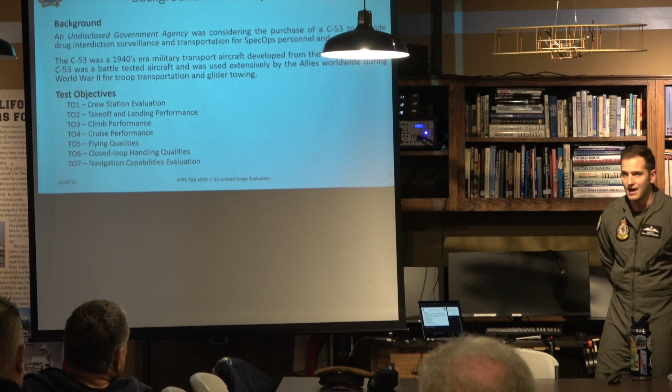A bit of background: put forward to us as a team, an undisclosed government agency was considering the purchase of a C-53 to provide drug interdiction surveillance and transportation for Spec Ops personnel and cargo. The C-53 itself is a 1940s era military transport aircraft, developed from the civilian DC-3 for those who aren't familiar. This aircraft is battle tested, having been used by allies worldwide during World War II for troop transport, glider towing, general cargo, and other related missions.

The objectives we had as a team were broken down from the user requirements. There are 7 general objectives. We looked at the crew station evaluation—how the pilot and crew in the front can do their job—the takeoff and landing performance of the aircraft as required for the mission, the climb and cruise performance for the mission set, the flying qualities (how the aircraft responded in the open loop sense, and then how we felt the aircraft responded through the controls), and finally the navigational capability of the aircraft.

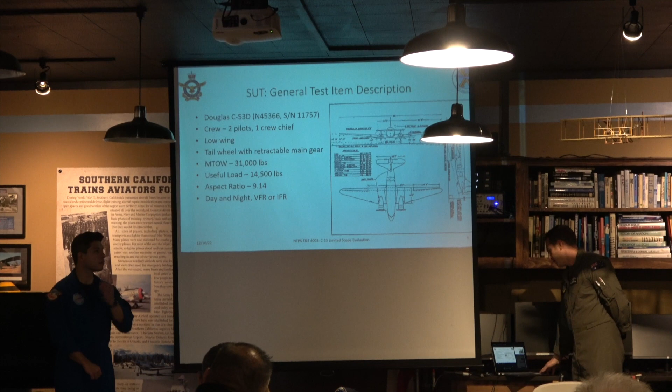Just moving on to an overview of the aircraft itself, for those who aren't familiar with the specifics of the aircraft. The reason we go through this is to highlight the aspects of the design that affect our results in our testing and what we're looking at.

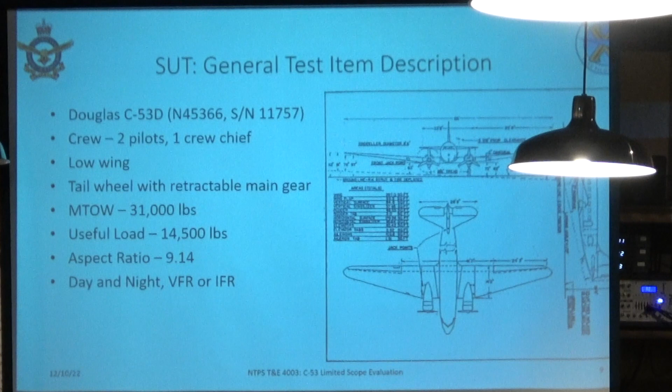A general overview: the crew is 2 pilots, 1 crew chief, a general low wing tail wheel with retractable main gear, max takeoff weight 31,000 pounds with a useful load of 14,500 pounds. The aircraft is capable for day, night, VFR, and IFR operations.

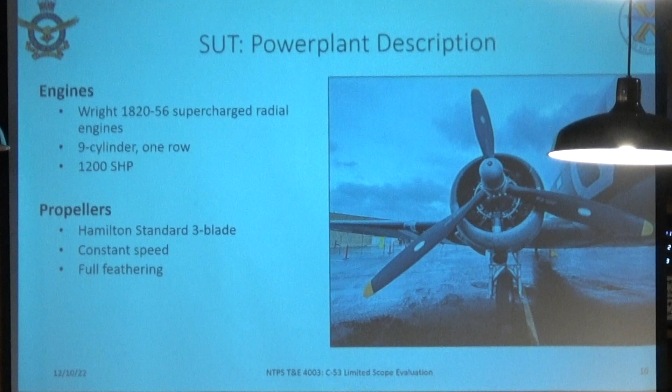For the engines, there are 2 options. The ones installed on this aircraft were Wright 1820-56 supercharged radial engines, the single row 9-cylinder as opposed to the dual row 18-cylinder engine. Same shaft horsepower of 1,200 each, with Hamilton Standard 3 blade props attached to each engine, constant speed with full feathering capability.

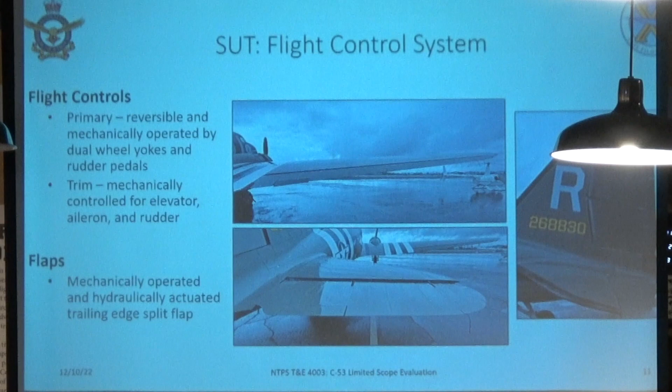Of particular note were the flight controls on the aircraft and the design as such. First of all, canvas covered primary flight controls. Of note, the top picture there shows the large aileron surface of the aircraft, which then feeds into a lot of our findings later for lateral control, adverse yaw effects produced by these large surfaces. Mechanical, fully reversible flight controls using dual yoke and rudder pedals, and for trims, mechanically controlled for elevator, aileron and rudder. The flaps are a split flap design on the inboard part of each wing section, taking approximately half the wingspan either side, hydraulically actuated trailing edge split flaps.

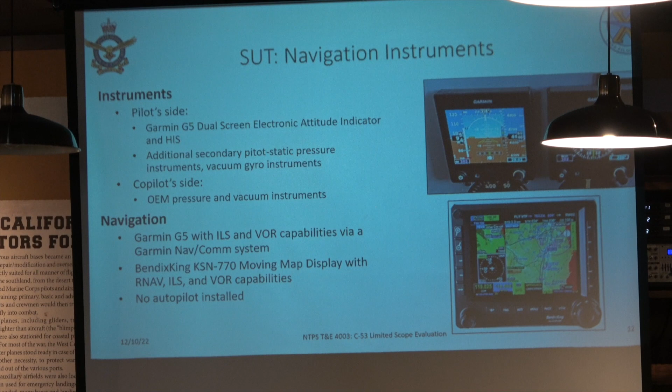The point of difference for this aircraft, as many would know, is the navigation systems installed. Differing from the original build of the aircraft, we have a Garmin G5 dual screen nav system connected to a Garmin nav as well, feeding ILS and VOR information as you can see in the top picture, and in the bottom picture, the Bendix King KSN 770 nav moving map display in the center of the instrument panel, both really useful for situational awareness and for that IFR and night capability. Other than that, we have standard original build pressure gauge instruments on the instrument panel. Point to note for this aircraft, and many like it now, the autopilot system had been removed and was not available for testing.

Just a quick overview of the limitations imposed on us as a team for the program. In terms of a test program, you normally want as many evaluators as possible to get different opinions and see those different opinions on any handling adverse effects that you find with the aircraft.

For this, we just had myself for the opinion there.

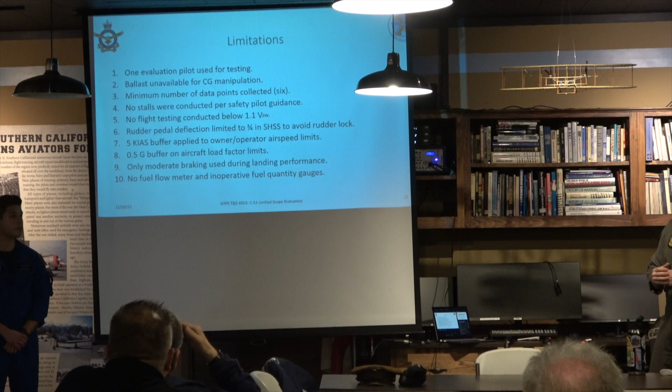Moving on to the CG, the center of gravity position of the aircraft. There was no ballast available. Normally in testing for different aspects, we want to move that CG position forward and aft, but we were just limited to the CG position on the day of testing, and we used the data as such from that point.

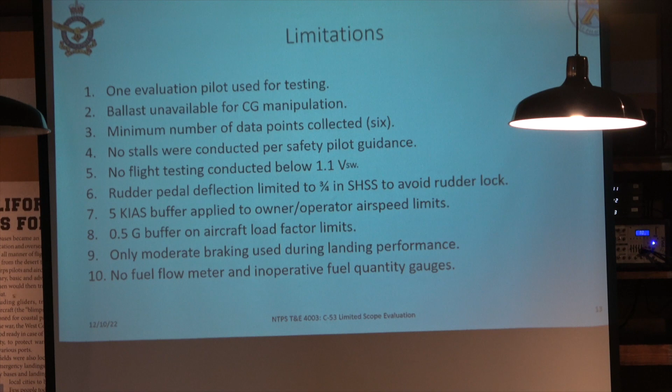In terms of statistical relevance, for us in flight tests we always want to achieve a minimum of 6 data points for each test we're doing, so we can really validate the information and data we are getting. That was our aim. We had a lot of tests we wanted to do in this program, and we only had 4 flights to do it, so we had to be really efficient. We wanted to get at least those 6 points in each test to actually get that relevance.

We're looking to conduct some stalls. Dan talked to us beforehand in the planning, advising that an approach to stall needs to be very fraught with caution. We were advised to only test up to the onset of the stall warning, as the characteristics of the aircraft can be quite unpredictable. So we stopped it there.

As such, we applied a 10% buffer on that stall warning speed we found on the first test flight. We did all of our testing performance-wise down to a 1.1 stall warning speed.

For rudder pedal deflection, due to a rudder lock risk, as advised by Dan, we wanted to avoid that for all of our testing. Rudder lock is when you apply full rudder in one direction, remove that pressure from your foot, and the rudder just stays there, which could be quite dangerous. We limited ourselves to 3/4 deflection, and had a scale attached to the bottom right of the cockpit to keep us in line with that requirement.

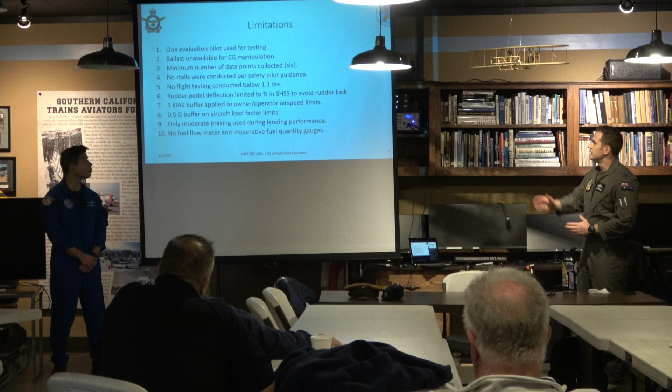Standard limits on the airspeeds and the G tolerance for the aircraft, so we didn't break anything, and we didn't need to go anywhere near those limits anyway.

The last thing was for performance testing for cruise evaluation. We really need to be able to take fuel flow or fuel use during our test points. Unfortunately, the aircraft's fuel gauges were inoperative, so we still did the testing using an assumption for our power settings and airspeeds appropriately, and then we applied an assumed fuel burn through those phases of flight for our actual analysis of the data.

Quick look at the instrumentation. We had a GPS data logger on board, which was really handy for our takeoff and landing performance. It allowed us to see the point at which we touched down and then took off from the runway, giving us really accurate measurements for that.

For all the forces and the controls, we had rudder pedals that were assumed, but for the yoke, I had a handheld force gauge.

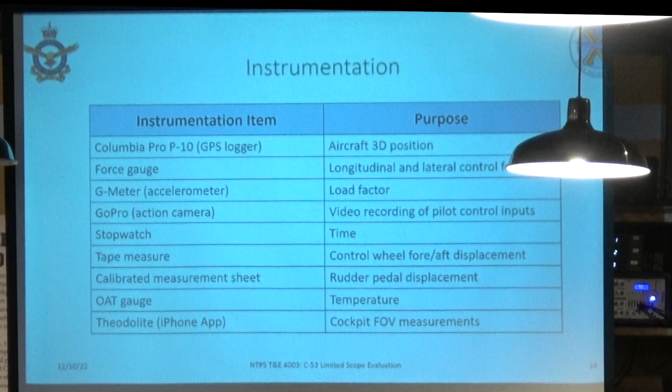We had a G meter on board, manned by the FTE in the back to advise us on our target G during our testing. We had some calibrated measurement sheets attached in the aircraft, and then a tape measure attached to the instrument panel where Dan measured our deflection on the yoke, and then we had the rudder pedal deflection as well that he could read.

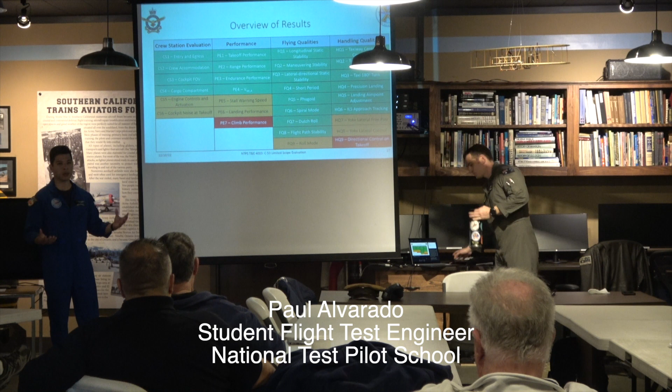Alright, thanks Luke. So now we're going to get into the meat of the presentation, what we tested, what we learned, what we saw. This is a general overview of the results. We divided into the crew station evaluation, performance, flying qualities, and handling qualities. Each individual box is a test objective that we tested.

If it is green, we found it to be acceptable. If it is orange, it was marginally acceptable. If it was red, it was unacceptable. To give a quick overview of the acceptables: the entry and egress, crew accommodation, cockpit field of view, and the cargo compartment were acceptable for the missions. The takeoff performance, range performance, endurance performance, and the VMCA were acceptable.

Flying qualities - the longitudinal static stability, maneuvering stability, lateral directional static stability, short period, phugoid, spiral mode, Dutch roll, flight path stability - were acceptable for the mission.

On the handling quality side, the taxiway centerline capture, taxiway centerline tracking, taxi 180-degree turn, precision landing, landing aimpoint adjustment, and ILS approach tracking are all acceptable.

I'm highlighting those now because we're not going to talk about them more in depth for the rest of the presentation. We'll spend most of our time on the marginally acceptables and the unacceptables.

On the crew station evaluation side, the engine controls and actuation and the cockpit noise were marginally acceptable. Performance, stall warning speed, and landing performance were marginally acceptable for our mission.

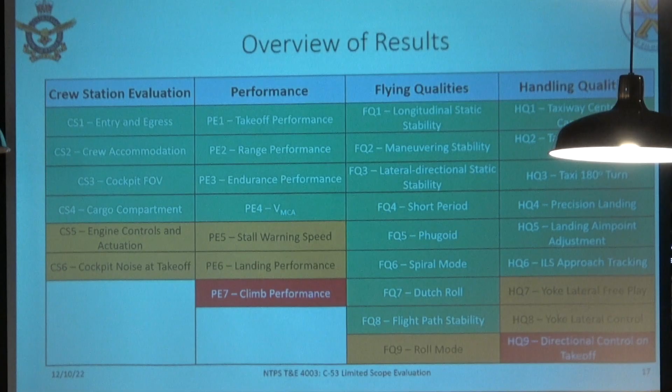Flying qualities - the roll mode was marginally acceptable, and on the handling qualities, the yoke lateral free play and yoke lateral control were marginally acceptable. Our two unacceptables were the climb performance for the mission, and directional control on takeoff.

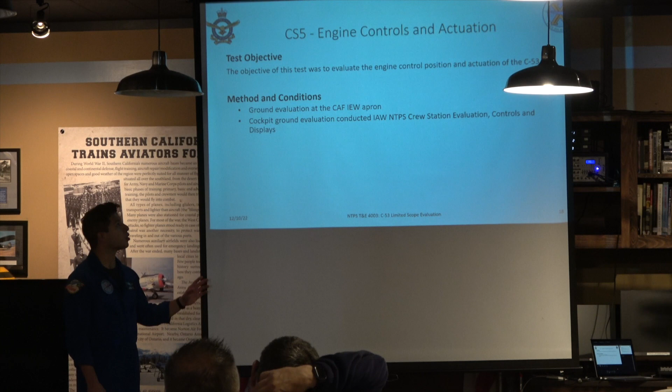The first thing I'll talk about is the engine controls and actuation. Our objective was to evaluate the engine control positions and how they move within the cockpit - does it make sense?

The method was during the cold evaluation on the apron on Monday morning. We conducted this in accordance with our own NTPS crew station evaluation handbook.

We had two results and analyses stemming from this test. First was the control ordering and grouping, and the next was the mixture lever movement.

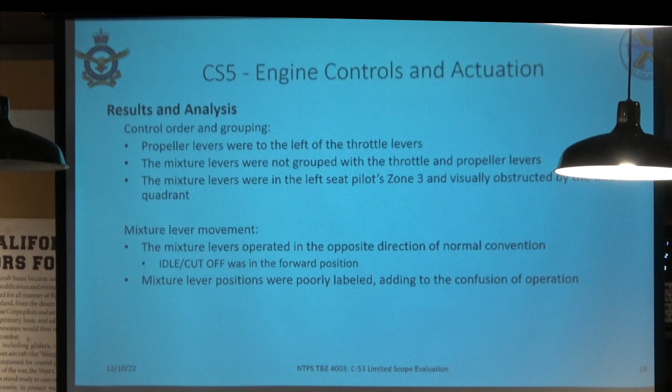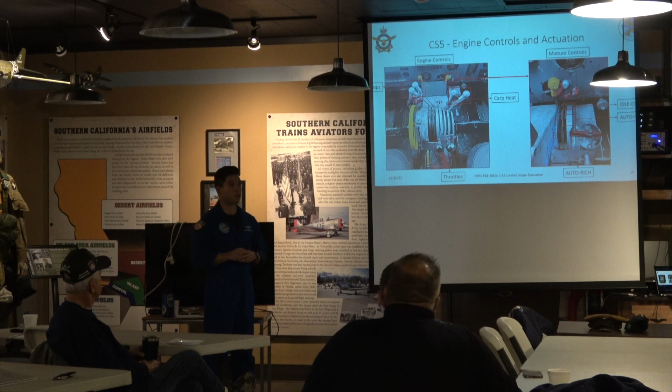For those that haven't seen the cockpit and the throttle controls, you have the props, the throttles, the carb heat, and the main throttle quadrant, and then the mixture controls on the far right side. That's depicted here in this picture. Obviously that's non-standard to normal aircraft today.

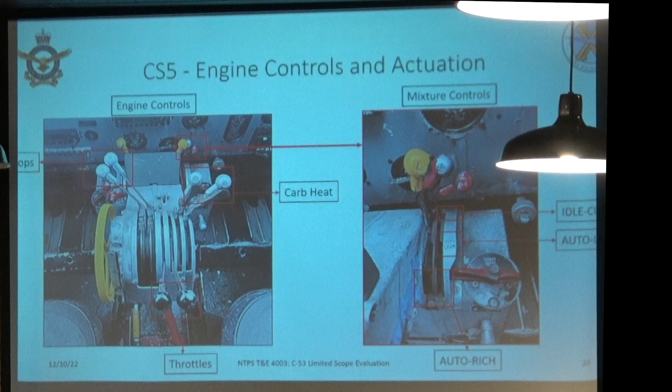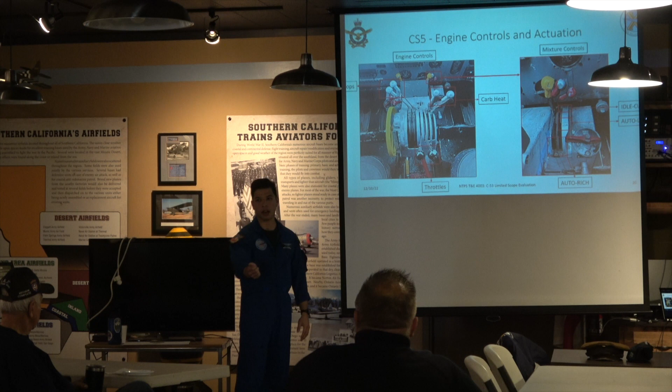Typically you expect to see throttle, prop controls, mixture, carb heat - it's not really a specified area. Then from the actuation of the mixture controls, the full aft position is auto rich, moving forward is auto lean, and the full most forward is idle cutoff, which again is opposite of normal movement for most aircraft.

The mission impact is twofold. First, the pilot in command may have difficulty reaching the mixture controls if the co-pilot is incapacitated during an engine emergency, delaying critical actions and possibly causing additional aircraft damage.

Second, a low experienced co-pilot may unintentionally shut down an engine in flight by moving a mixture lever forward to the idle cutoff position when attempting to select auto rich from the auto lean position.

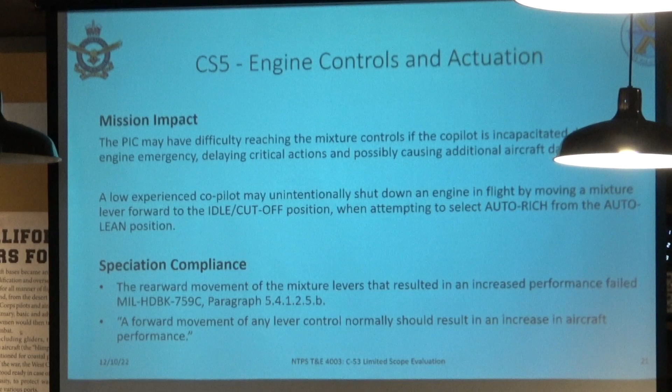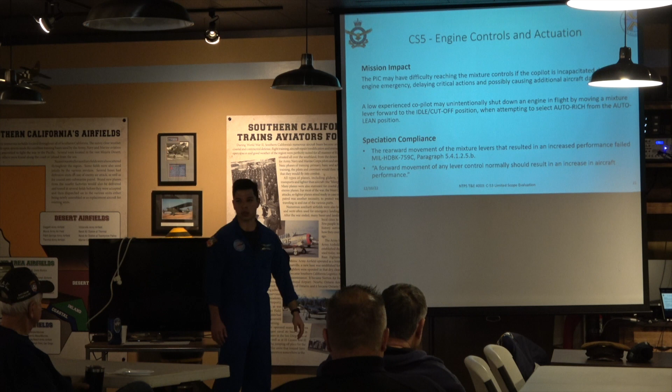There was one specification of compliance we compared this against - the Mil Handbook 759 Charlie, specifically paragraph 5.4.1.2.5 Bravo. It says forward movement of any lever control normally should result in an increase in aircraft performance. Clearly, the mixture control lever does not meet that standard.

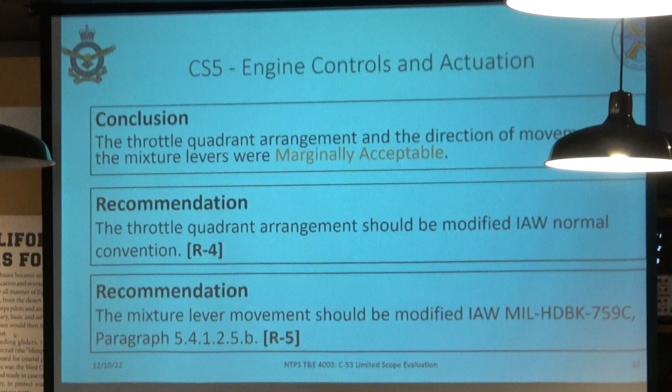We had a single conclusion and two recommendations. The conclusion is the throttle quadrant arrangement and direction of movement for the mixture levers were marginally acceptable. Recommendation: the throttle quadrant arrangement should be modified in accordance with convention - throttle, props, mixture. Recommendation: the mixture lever movement should be modified in accordance with Mil Handbook 759 Charlie, where full forward is auto rich.

Next is the cockpit noise at takeoff. The objective was to evaluate the cockpit environment during takeoff. The takeoff power was 44 inches, 2500 RPM.

The results and analysis were all qualitative - we didn't have any instrumentation to measure the sound. We weren't really anticipating this, but with takeoff power applied, the radio and ICS calls are very difficult to hear.

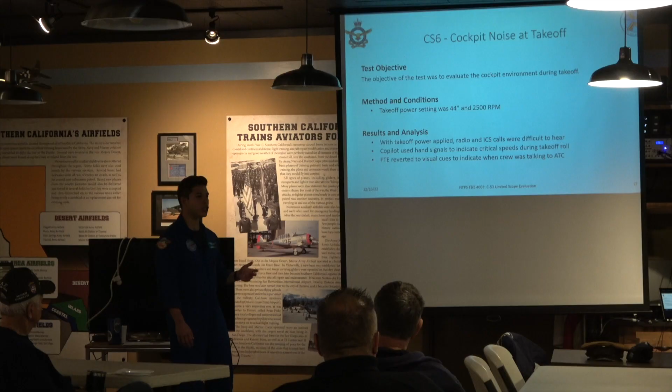The co-pilot had to use hand signals to indicate rotation speed, and me trying to conduct the test, I didn't realize they were keying the mic to talk to ATC unless I saw him physically keying the mic. I just couldn't hear it over the engines.

So the mission impact is that the normal cockpit noise with takeoff power applied may reduce the crew's ability to hear incoming radio calls, decreasing situational awareness and crew resource management.

There is an advisory circular, 20-133, cockpit noise and speech interference between crew members. When the noise level in the cockpit exceeds 80 decibels - again, we didn't measure it - the noise will be of sufficient magnitude to impede normal cockpit communication.

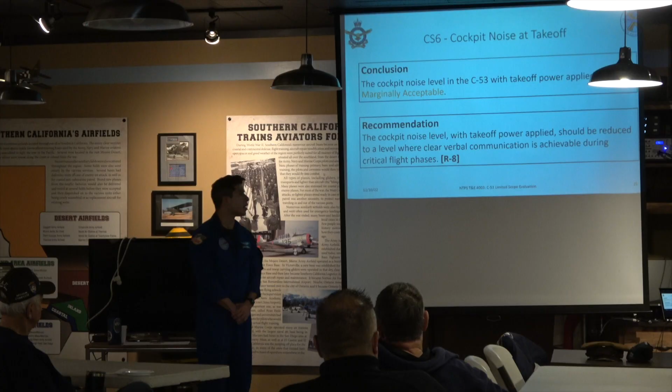In conclusion, the cockpit noise level in the C-53 with takeoff power applied was marginally acceptable. Our recommendation was that the cockpit noise level with takeoff power applied should be reduced to a level where clear verbal communication is achievable during the critical flight phases.

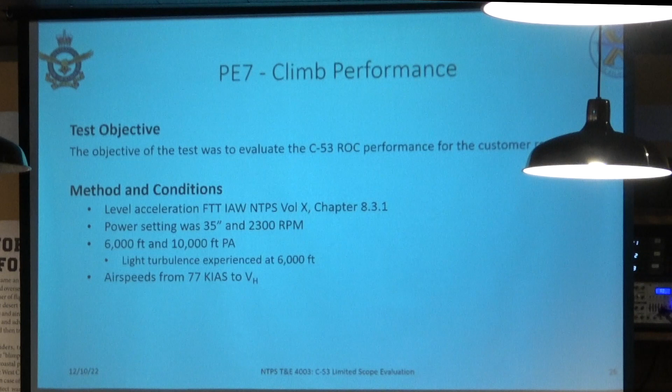We used a level acceleration flight test technique, our FTT, in accordance with the NTPS Volume 10, Chapter 8.3.1, which is just our handbook for doing these flight tests. The power setting used was 35 inches manifold pressure, 2300 RPM on the propellers.

We did this at 6,000 feet and 10,000 feet pressure altitude, and we experienced light turbulence at 6,000 feet, which you'll see in the data on the next slide. We did it from airspeeds of 77 knots, our 1.1 V-stall warning speed, to VH, the max level speed.

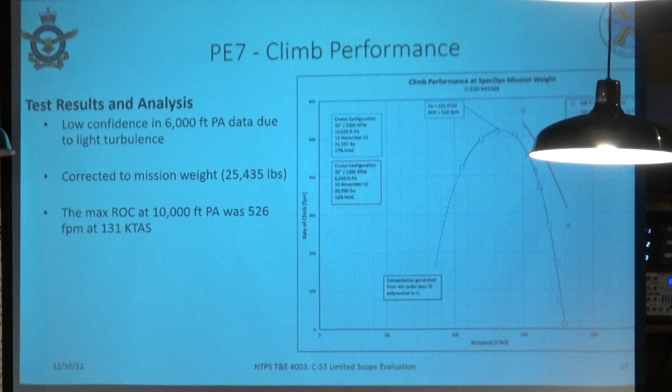In theory, the higher you climb, your rate of climb decreases. So you expect the rate of climb curves to converge, and also you expect your VY speed to decrease as well. So the curve should decrease and move slightly to the right, and the 10,000 foot data is below and to the left of the 6,000 foot data, which gave us higher confidence in the 10,000 foot data.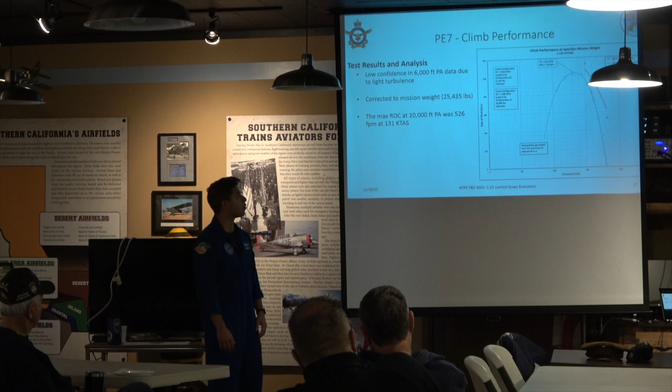For data analysis, using the 10,000 foot data, we got a VY speed of 131 knots true and a rate of climb of 526 feet per minute, compared against the customer requirement of 1,000 feet per minute from 0 to 15,000 feet in the cell. The climb rate of the C-53 will increase fuel consumption by approximately 70 gallons using Dan's estimations during the climb to altitude, reducing mission fuel efficiency and the fuel margin for additional tasking.

For specification compliance against the customer requirement, the maximum observed rate of climb of 526 feet per minute failed to meet the customer requirement of 1,000 feet per minute by 474 feet per minute, which is a 47.5% failure.

In conclusion, the slow climb rate of the C-53 did not meet the customer requirement and was unacceptable. We recommend the climb rate of the C-53 must be improved to meet the customer requirement.

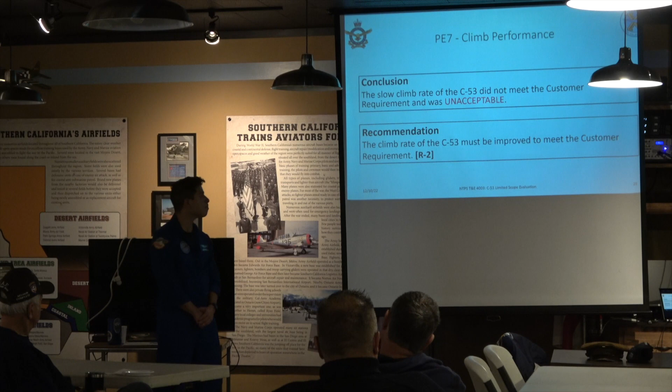Next, we'll look at the landing performance. The objective of the test was to evaluate the ground roll for the customer requirement. The configuration was gear down, flaps full.

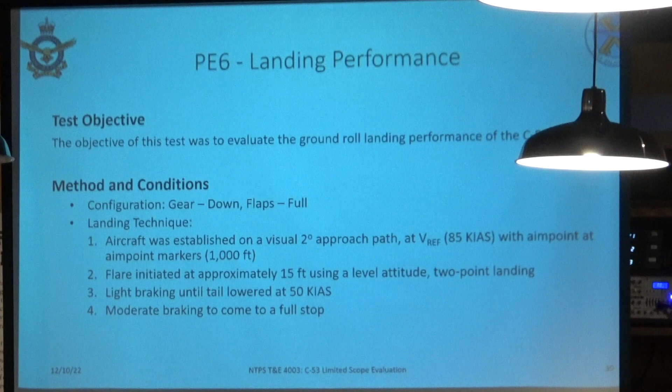The landing technique is as listed above: a 2-degree visual approach path using VREF of 85 knots, landing with an aim point of the aim point markers, the 1,000-foot markers, or captain's bars, however you want to call them. The evaluating pilot initiated a flare at approximately 15 feet using a level attitude to get a 2-point landing, light braking until the tail was lowered at approximately 50 knots, then moderate braking to come to a full stop in accordance with our limitation.

On the right is a graph depicting all of our data. The individual columns are the 5 test points that our evaluating pilot did. The red line is the customer requirement, 3,000 feet. The green line is our 95% confidence interval.

If you were to do this 100 times, 95% of the time the pilot would stop within 3,275 feet, which does not meet our customer requirement. All the data was normalized to a mission weight, the spec ops mission weight of 25,000 pounds, standard day sea level.

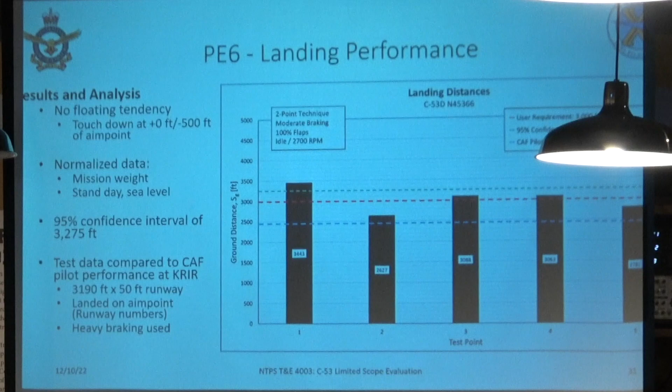And then, as Duff mentioned earlier, we got to go to Flabob Airport. Dan was very familiar with our landing technique. We asked him to do a landing using maximum braking, since he was allowed to do that as the owner-operator of the aircraft. Using his data, normalized, he did a stop in 2,448 feet using maximum braking.

The mission impact is that a pilot conducting a short field landing may exceed the runway available if less than heavy braking is used, leading to aircraft damage and injury to crew.

The customer requirement was a specification to operate on a 3,000-foot runway at mission weight. Using moderate braking, the 3 landing test points did not meet the customer requirement, and their 95% confidence interval also does not meet it. However, the Commemorative Air Force pilot did demonstrate compliance by using maximum braking.

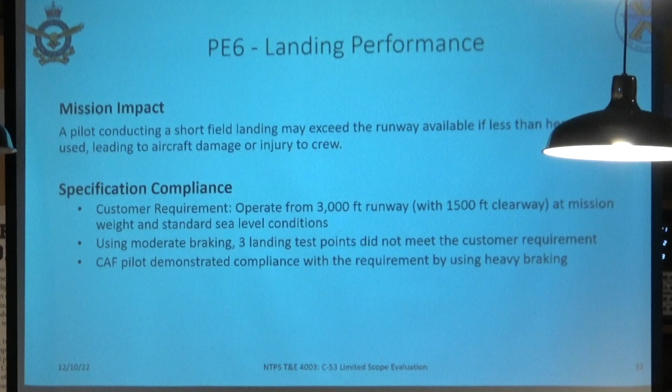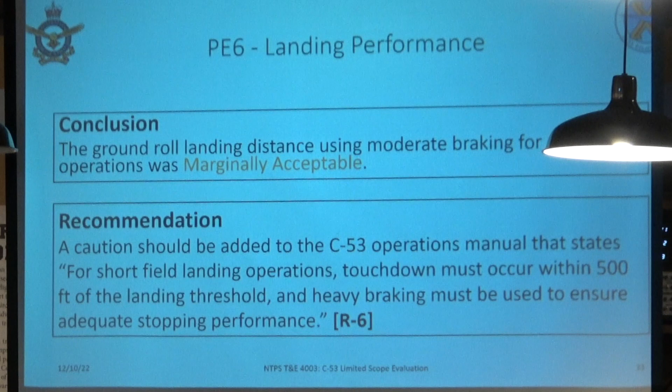In conclusion, the ground roll landing distance using moderate braking for the short field operation was marginally acceptable. We recommend caution be added to the C-53 operations manual. Surprisingly this isn't in here, but it states that for short field landing operations, touchdown must occur within 500 feet of the landing threshold, and heavy braking must be used to ensure adequate stop performance.

And I'll pass it back to Duffy.

Moving on to looking at the stall warning and stall warning system of the aircraft. The objective was to determine our stall warning speed of the aircraft. We did this pretty much straight away on the first flight, so it anchored our lowest speed for all of our testing at 1.1 VSW.

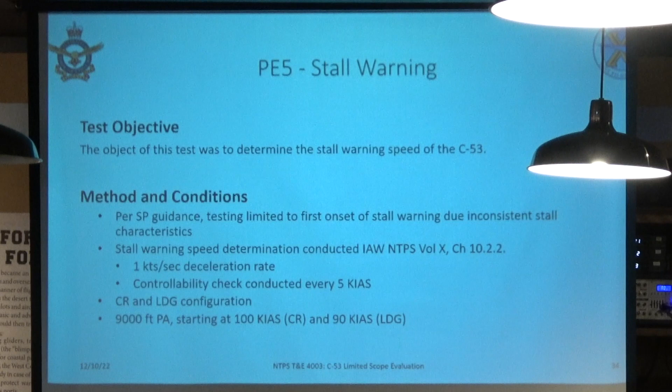Per the safety pilot guidance, Dan's guidance, we were limited to the first onset of the stall warning of the aircraft. So we went through and conducted our approach to stall as per our normal flight test technique at NTPS, looking at a 1 knot per second deceleration rate from our setup speed. Every 5 knots we paused and conducted a controllability check in all 3 axes to make sure the aircraft was controllable and no unsafe characteristics at those speeds.

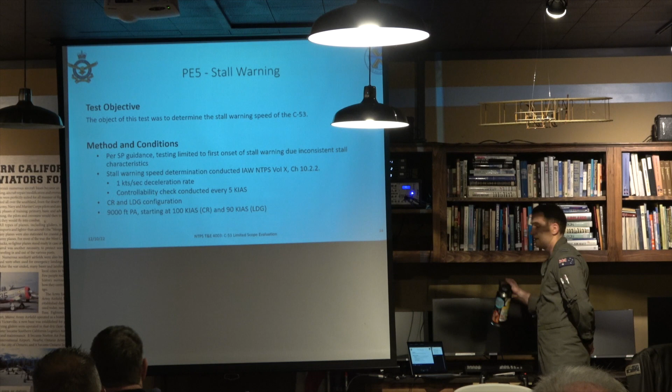We conducted this evaluation in both cruise and landing configuration. We looked to set up the test point at approximately 9,000 feet just to have a nice safety buffer for ourselves, and the starting speeds were 100 and 90 knots respectively.

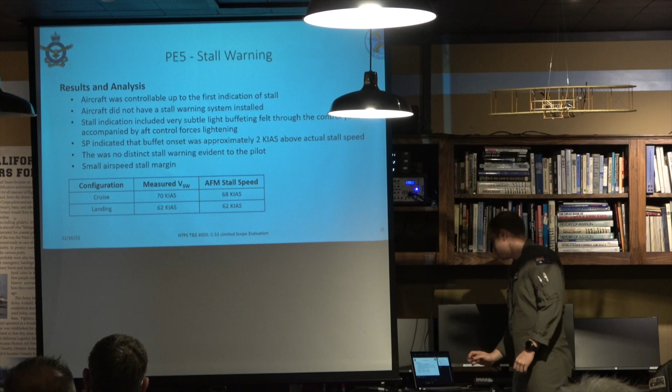What we saw was the aircraft was controllable all the way out. It was quite nice handling all the way through to that stall warning speed.

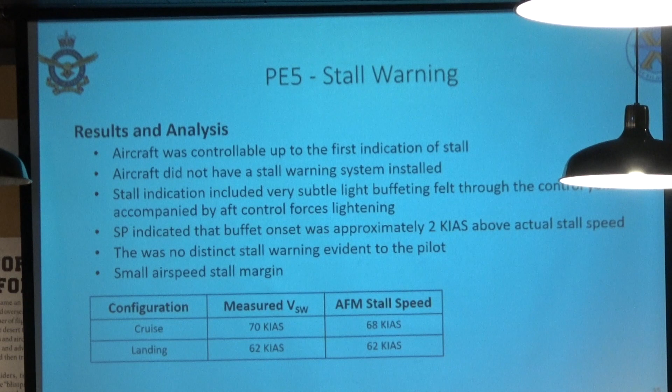The point of note though was the aircraft didn't have an artificial stall warning system installed at all. So all the crew relied on was the feeling of the aircraft talking to you close to that stall speed. At the point where the stall warning onset came on, Dan said to us, 'You feel that? That's the stall warning.' I was quite surprised because there was a very subtle indication of light buffet through the controls and a bit of aft force lightening in the yoke right at that stall warning speed.

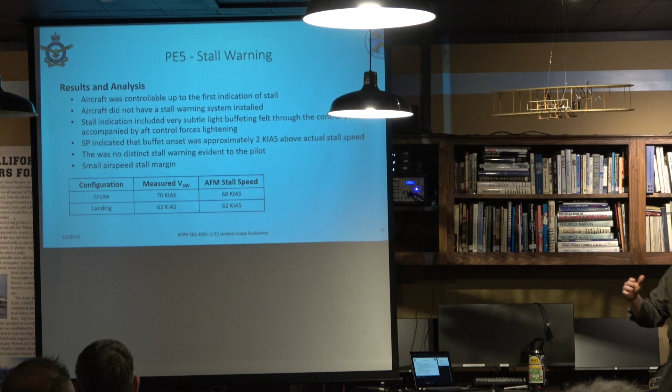At that point we dwelled and stayed at that speed just to really feel what it felt like. Dan indicated to us that we were approximately 2 knots above the actual stall speed for the aircraft. This highlights a point here.

Using what we saw, we recorded a stall warning speed in the two configurations of 70 knots and 62 knots. Looking at the flight manual, the actual listed stall speed, which would be at max weight, is 68 and 62 knots respectively. So the margin there isn't very big, or non-existent at all. And the warning for the pilot is subtle — you really need to be paying attention for that stall warning.

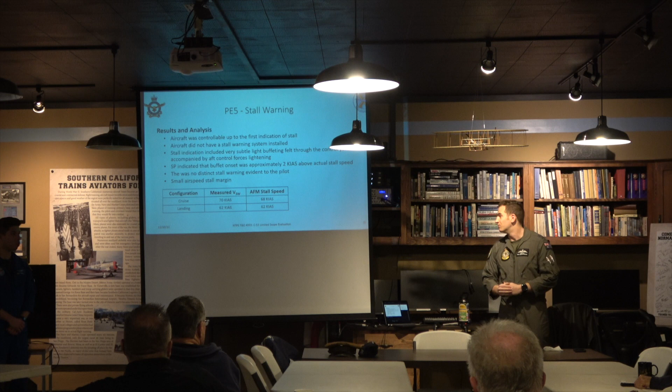So what does this mean to us moving forward employing this aircraft? Something we might look at is that without an adequate stall warning system, a typical operational pilot conducting the mission set for night loiter operations may experience intermittent buffeting through the controls close to stall speed, distracting them from the primary mission task. They get distracted by that feeling from the aircraft, have to go back to controlling it, get the speed under control, and then return to the task again.

For the civilian standard, the stall warning with sufficient margin to prevent inadvertent stalling, with the flaps and landing gear in any normal position, must be clear and distinctive to the pilot in straight and turning flight. From the MIL standard, the stall approach shall be accompanied by an easily perceptible warning consisting of shaking of the cockpit controls, buffeting or shaking of the airplane, or a combination of both. So it's pretty clear, the requirements set forward in the current specs.

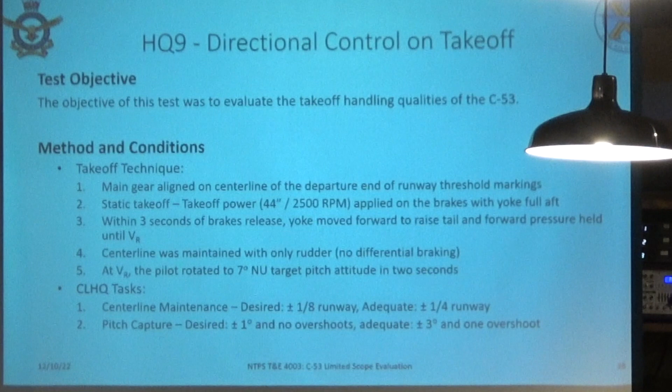For the takeoff technique, we kept it repeatable, using the same technique for all of our takeoffs so we could compare them together. We lined the aircraft up with the main gear on the center line, on the departure end of the threshold markings, the piano keys. Static takeoff was used, applying takeoff power of 44 inches, 2500 RPM, with brakes applied and the control yoke full aft. From brakes release, within 3 seconds the control yoke was moved forward to lift the tail, with forward pressure applied up until rotation speed to keep the aircraft on the runway. For directional control, maintaining the centerline, only rudder pedal inputs were used, with no differential braking at all.

We had some task requirements. For the centerline, we wanted to simulate being on a 50-foot runway, so desired and adequate performance had us at the edge of that simulated runway. For the pitch capture on rotation, we wanted to rotate the aircraft and capture a target of 7 degrees nose up within 2 seconds at rotation speed. The requirement was within 1 degree of target with no overshoot for desired, or within 3 degrees with 1 overshoot for adequate.

What we saw during most, if not all, of the takeoffs is that for the pitch capture task, the aircraft behaves really nicely in the longitudinal axis. Pitching up to capture that 7 degrees nose up was quite easy for all of the tasks conducted.

However, the centerline maintenance was quite challenging. We have a rating scale system where 1, 2, 3 is quite easy to complete a task, and 4, 5, 6 is where moderate pilot compensation is required to get the task done. The centerline maintenance ended up with a rating of 4, accompanied by comments on the difficulties involved in modulating the rudder pedal inputs throughout the takeoff roll to maintain centerline tracking.

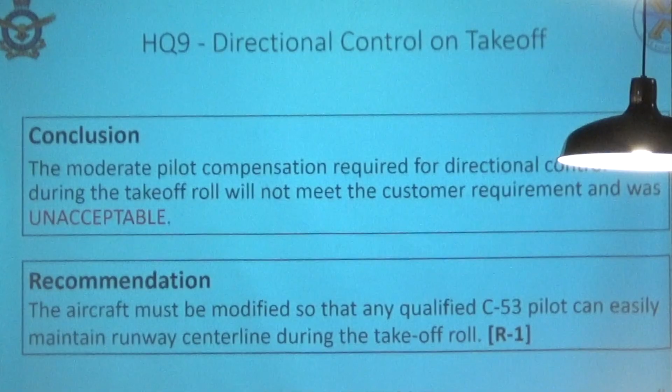In conclusion, the moderate pilot compensation required for directional control during the takeoff roll will not meet the customer requirement and was unacceptable. The aircraft must be modified so that any qualified C-53 pilot can easily maintain runway centerline during the takeoff roll.

Moving now into some flying handling qualities, looking at the lateral axis for our control. We're starting with the roll mode, particularly looking at the roll performance of the aircraft and how that relates to us controlling it.

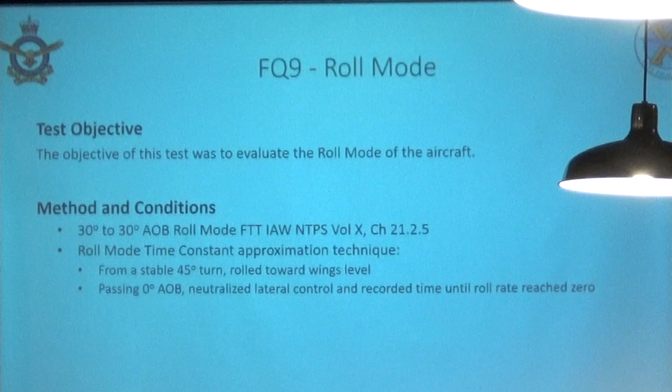We have a test technique where we set the aircraft up in a 30-degree angle of bank turn, then command a roll towards the opposite 30-degree angle of bank, timing how long it takes from 30 to 0 to 30. We then apply this timing to requirements outlined in the MIL standard.

We also have an approximation of what's called the roll mode time constant. This is how quick the aircraft reaches 63% of the steady state roll rate. Because we don't have any instrumentation installed, we have to approximate this.

How we did this: starting in a 45-degree turn, we got the aircraft in a steady state roll. Coming through wings level, I called hack, neutralized the controls, and then called hack again when the aircraft stops moving. We then divide this by 3, and that gives us an approximation of how fast it gets

to its steady state roll rate. As you can see here, this is the time to roll in the table displayed on the top. The rightmost box is what's applicable for our MIL standard.

That's a 45-degree angle of bank change. It's actually quite slow, and this was the first thing we noticed as a crew: the roll rate of the aircraft, with the combination of the large surface, the long control lines, the big control yoke, and the free play, all getting involved there to slow down that roll rate with that giant wing and the inertia damping out there.

Because of this, there was some moderate compensation required from the pilot to actually get the desired roll rates, and this required me to really drive the control deflection further than I thought initially I needed to get the aircraft to the roll rate I wanted to conduct a normal turn.

Relating this then to the mission impact: if you're in that loiter operation and reversing the aircraft over to get your eyes onto something on the ground, you really need to compensate by driving that control further than you need to get to that roll rate.

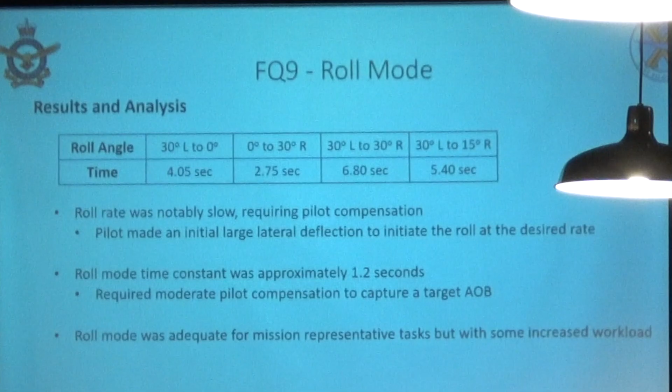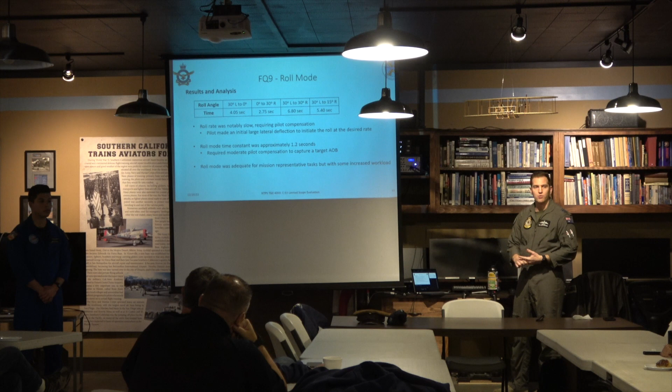The roll mode time constant again - it's not only the roll rate at steady state, but getting to that steady state was quite slow. So that 63% was about 1.2 seconds, getting close to that 3 seconds now to actually get to that steady state roll rate.

Slow roll rates and long roll mode time constant will require compensation to conduct mission representative tasks, which will elevate baseline workload of loiter operations, possibly reducing pilot capacity for additional mission-related tasks.

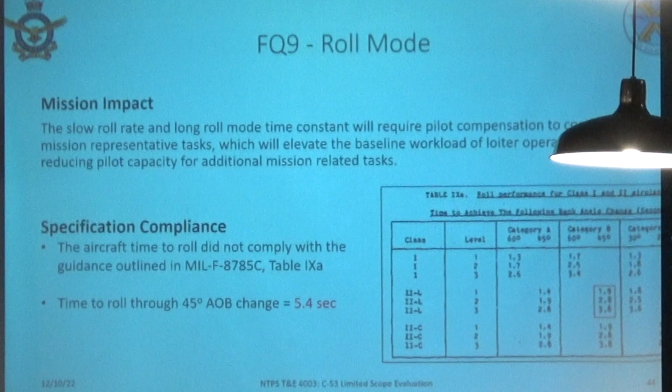In terms of spec compliance, on the right is a table which is an excerpt from the MIL standard requirement. To be clear, this is our class of aircraft here. Handling quality levels, we have 1, 2, and 3. The customer wants a level 1.

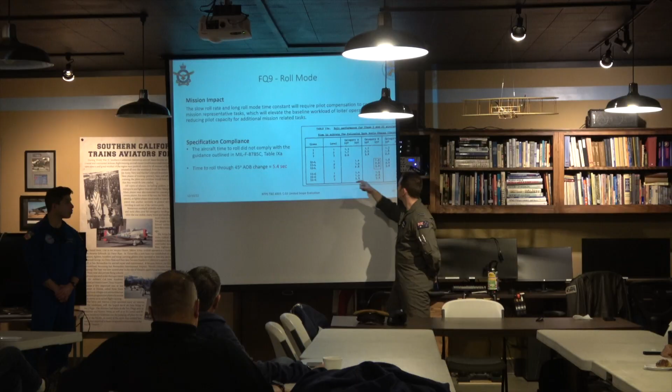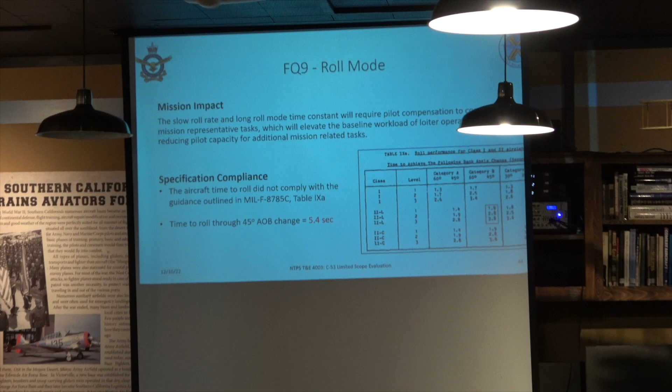This is the time required to move through a 45-degree angle of bank change. For us, we recorded 5.4 seconds, which actually falls outside the bottom of the level 3 requirements there. So it's quite difficult to achieve these requirements in the MIL standard.

The roll rate and roll mode time constant for mission representative tasks, turning tasks, was marginally acceptable. So we recommend the aircraft should be modified to meet the level 1 time to roll requirements as detailed in the MIL standard, particularly that table I showed on the previous slide.

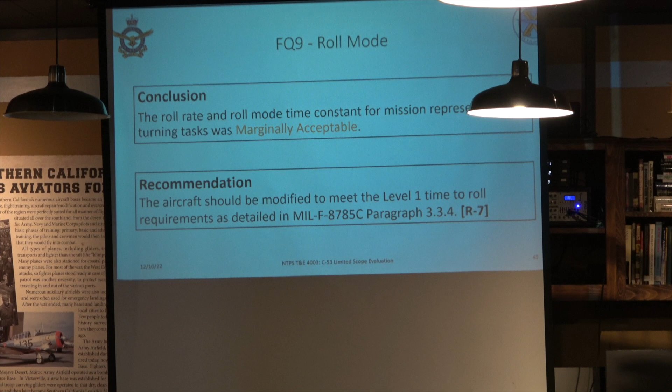Staying in the same space of lateral control, we noted a deficiency looking at the free play in the yoke itself laterally. So we wanted to evaluate the flight controls free play in all axes. Everything was adequate barring this lateral axis.

We were looking at this both on the ground, and we also looked at this during our flight testing, during the roll performance testing, and then just during general handling qualities of the aircraft flying around, simulating flying the mission tasks. What we saw was approximately 20 degrees of free play.

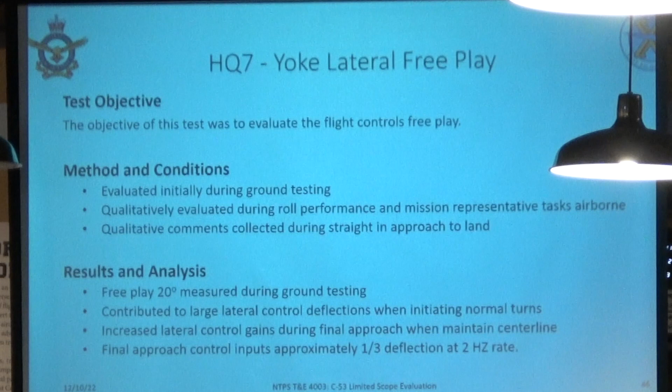Just to outline what that is: it's movement of the controls which then had no movement of the flight controls at all. So it was just that slack in the controls where nothing was happening. Each time you wanted to input a control in the ailerons, you have to move through this area and then command a roll. This contributed to the large control deflections required to initiate the turns, and then also the roll rate, and then also anticipating the roll commands.

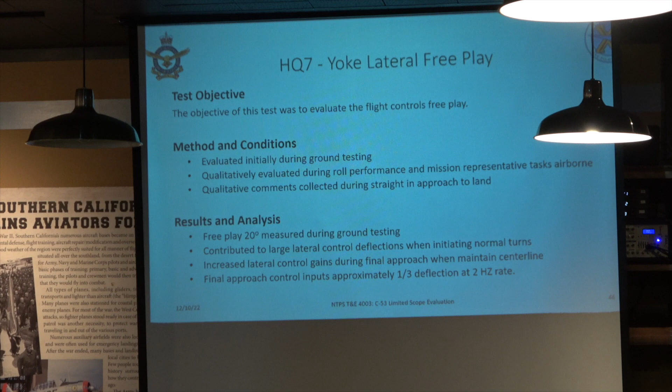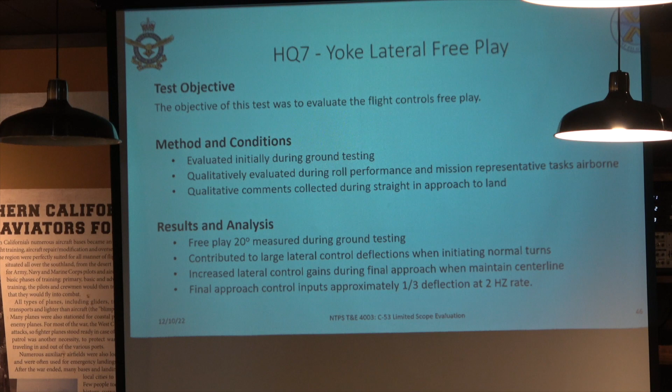We talk about control gains during tasks. High gains is where you're conducting a task that's quite involved for the pilot to be very accurate for what you're trying to fly, and then the control inputs are not only large but they're also quite fast. High gains is a term we use to quantify and explain what we're doing and what we're feeling during a task.

This free play definitely contributed to the high gains required for landing tasks and any precision lateral tasks we needed to do.

To me as a pilot, this feels like I'm really over-controlling the aircraft. So artificially, it drives up what I think the perceived workload is for the task, and it takes away a little bit of that mental capacity for anything extra that might be happening outside the aircraft. Coming into land, especially on the ground too, for that lateral control, I end up using large control deflections with 2 hands, again, taking away that mental capacity, where otherwise it might be a bit easier had that free play not being there.

Large free play lateral controls could elevate the baseline workload during normal mission representative tasks, which may reduce the pilot's capacity for additional tasks. We didn't have a specification compliance for the free play. However, our conclusion is the C-53 lateral control free play for mission representative tasks was marginally acceptable. The aircraft should be modified so that there is no pilot perceived lateral free play in the control system.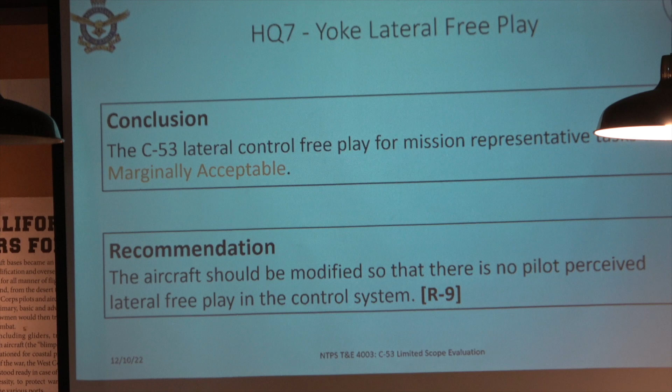Another deficiency looking in this same lateral control sense was the actual control deflection itself. So we now have the pilot compensation of requiring us to drive further to get our roll rate we want. We have the free play we have to move through before we even command the roll, and then this ends up with a large overall control deflection required for our normal tasks.

So what we looked at was assessing this control required for all of our tasks for our flying. We assess this again through the roll performance and then qualitatively during pattern work to land and also our loiter turning mission tasks. As you can see on the right there, this is our deflection recorded. So on the right is full deflection, that's 180 degrees. That's actually quite uncomfortable when you're sitting in the seat. Even passing the controls through your hands, it's time consuming and it gets a bit awkward at times.

And then on the left is 2/3 deflection. So that and about 100 was what I was using to initiate rolls at the rates that I wanted, especially turning up to that base turn point for the capacity to land. We looked at turns at 30, 45 and 60 angle of bank to see what the effect of this control was. So accommodating this control as well was approximately 40 pounds of lateral force there.

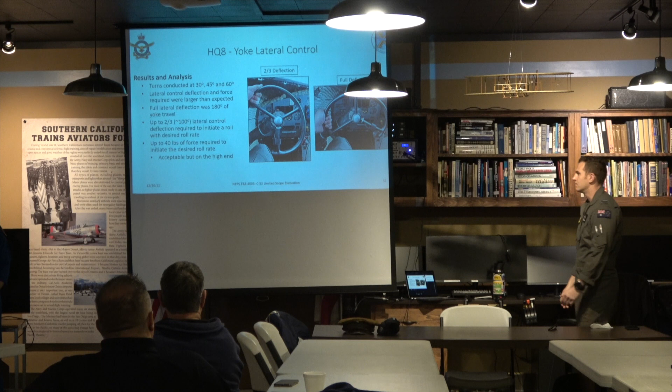So you can imagine that 40 pounds in one hand, if you're manipulating props and engines on that base turn to land, it gets a little bit fatiguing and drives up that workload for the pilot a bit more. Of note, that 40 pounds in the mil standard was acceptable, however, it was in the high end of the acceptable range.

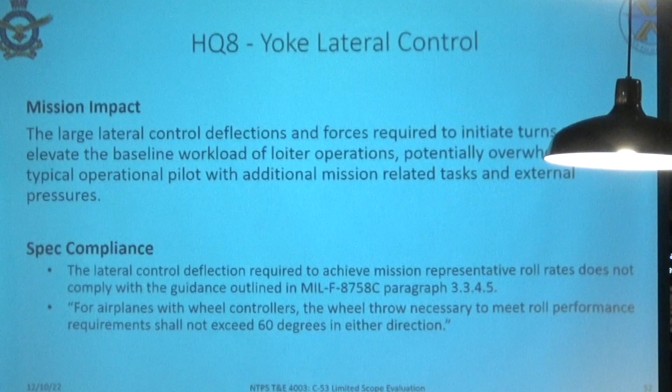So the large lateral control deflections and forces required to initiate turns may elevate the baseline workload of loiter operations, potentially overwhelming the typical operational pilot with additional mission-related tasks and external pressures. In terms of the spec compliance, the mil standard looks at the deflections for representative roll rates. So for airplanes with wheel controllers, the wheel throw necessary to meet roll performance requirements shall not exceed 60 degrees in either direction. So we're using approximately 100 degrees to make our normal turn, so a little bit elevated on that 60 requirement.

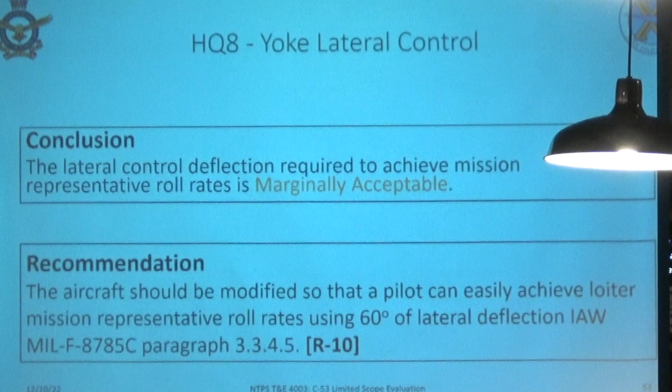The conclusion from us is the lateral control deflection required to achieve mission representative roll rates is marginally acceptable. The aircraft should be modified so that a pilot can easily achieve loiter mission representative roll rates using 60 degrees of lateral deflection in accordance with the mil standard, paragraph 3345, previously quoted.

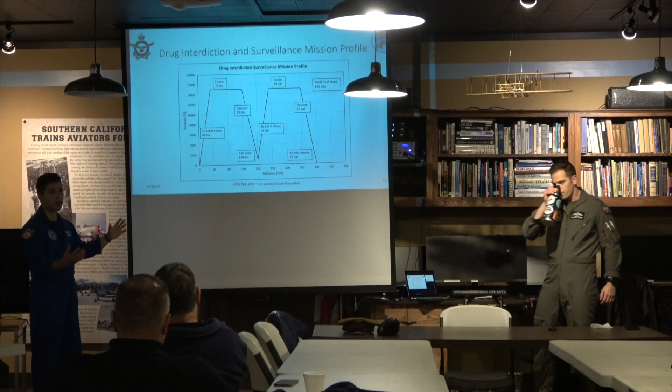Over to Paul to talk about the mission profiles and conclusions. Yeah, so again, when Duff introduced the two missions, there's a profile associated with each one. So this is the drug interdiction surveillance mission. We wanted to find the fuel flow for each portion of the mission to verify that the airplane had enough capacity to do so.

Ideally, we would have recorded fuel flows or fuel quantities to collect reduced actual data, find an actual best range speed, best endurance speed, and the associated fuel flows. But instead, we used approximations from Dan. He said about 200 gallons per hour on climb, 100 gallons per hour in cruise, and 70 gallons per hour on loiter.

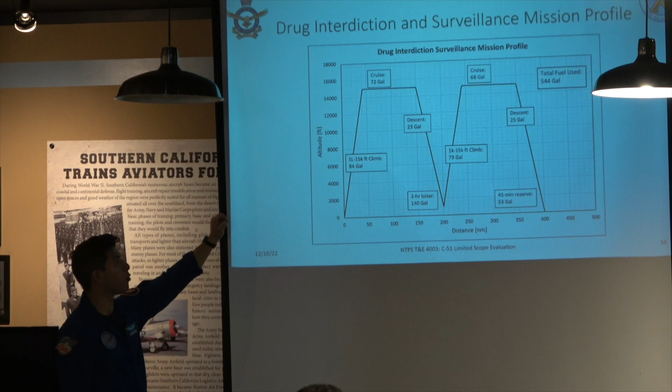So using those numbers, we plugged it into our profile. On the climb from sea level to 15,000 feet, we used 84 gallons. On the cruise out to our descent point, it's 72 gallons. During the near idle descent, it's 23 gallons used. Two-hour loiter is 140 gallons, and then coming back up from 1,000 to 15,000 feet is 79 gallons.

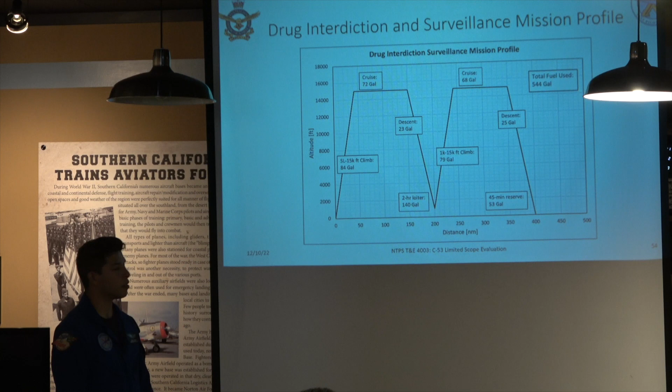Coming back to the initial airfield, 68 gallons; before your descent to land, 25 gallons used; and then the 45-minute reserve was 53 gallons. Altogether, that was approximately 544 gallons. We're comfortable with this number because the aircraft carries over 800 gallons of fuel, so even with some fudge factor in our fuel estimations, that's well within the capacity of the DC, or the C-53, excuse me.

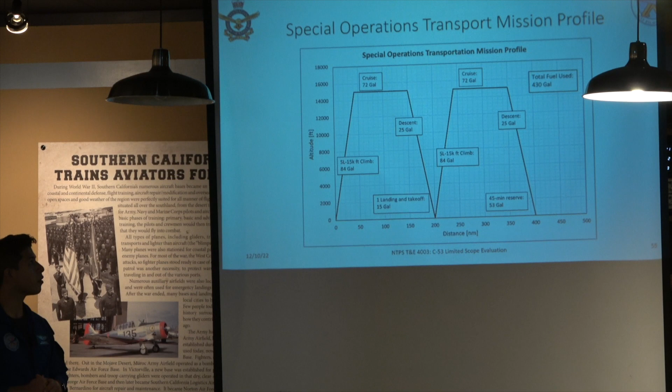Looking at the spec ops transportation mission, again a very similar profile, except instead of the 2-hour loiter, you come down for a single landing and takeoff, estimated at 15 gallons used for that. Without repeating all the same numbers, the total fuel used is 430 gallons. Again, that's almost half a tank approximately, so well within the capacity of the C-53 to fly this mission.

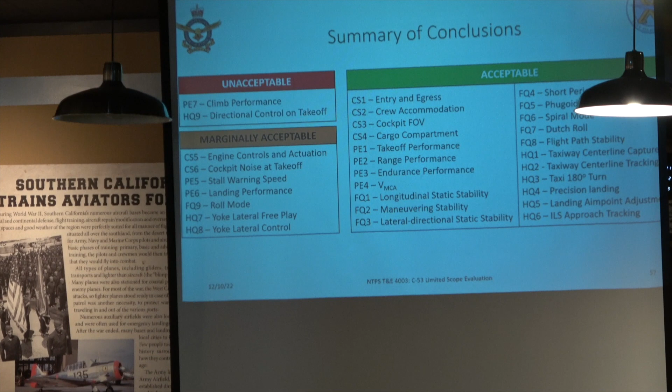Now we're going to go to our conclusions and recommendations for our test. This is a summary of our conclusions. We had two unacceptables: the climb performance and directional control on takeoff. Again, those are mostly unacceptable because they failed the customer requirement, not because they were actually truly unacceptable. Marginally acceptable was the engine controls and actuation, cockpit noise at takeoff, the stall warning speed, landing performance, roll mode, yoke lateral free play, and yoke lateral control.

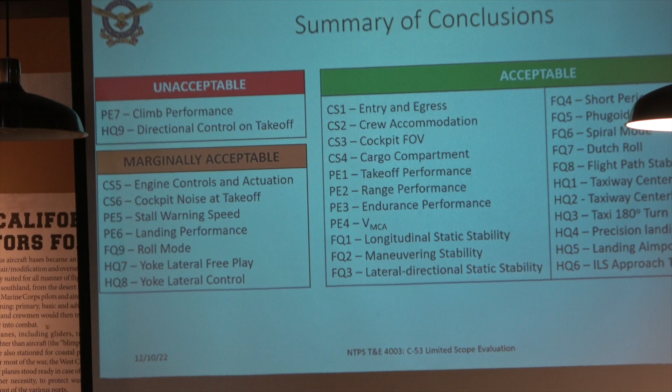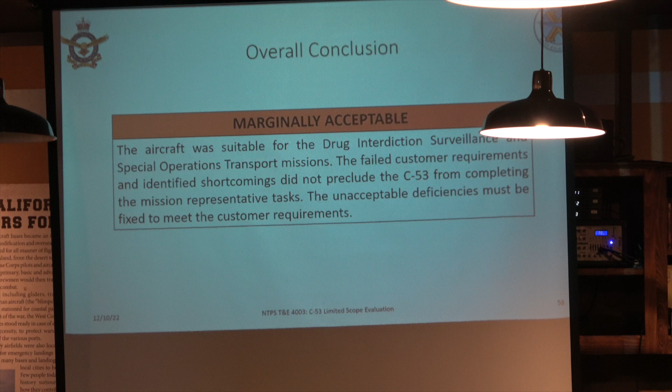However, we had an overwhelming number of acceptables. Over 70% of our test objectives were acceptable, which drove our final conclusion for the aircraft: we found it marginally acceptable. The aircraft was suitable for the drug interdiction, surveillance, and special operations transport missions. The failed customer requirements and identified shortcomings did not preclude the C-53 from completing the mission representative tasks, and the unacceptable deficiencies must be fixed to meet the customer requirements.

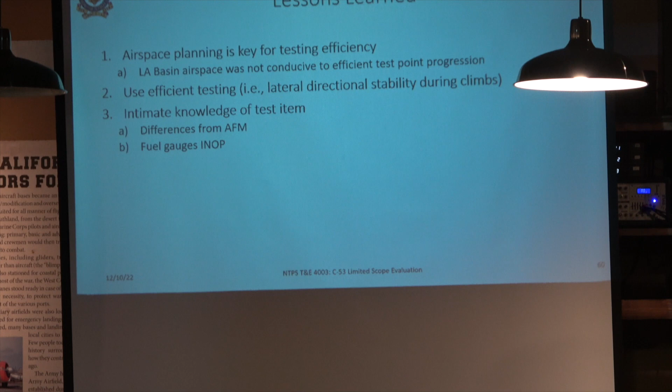Just for us as a team, what we learned through this experience: it was great operating in really congested airspace, which was the LA Basin. We didn't anticipate how difficult it would be to find nice airspace to do our testing. The first flight, we just got pushed around by ATC and our test points kept getting cut off halfway through. We had to reevaluate and move to different areas to get anything done. For our second flight, we had Dan coordinate with the local controllers to get us an area we could use, which worked a lot better.

And this forced us to be more efficient in our testing. The first flight we wasted a bit of time. We had lots of test points to get done, so we really started cramming them in where we could, using the climbs, descents, and any spare time between positioning and test points to fit in more points we missed on the first flight. It was really good for us to learn the experience of operating in congested airspace, because all year we've been up near Mojave where we have our special little box to operate in - you don't really have to think about that stuff at all.

So good for us to learn how to play with others. And then the last point for us is the test item itself, the aircraft. We had all these flight manuals sent to us for our test planning, but we didn't actually get our hands on the aircraft until we got here, and our test plan was written with all of our testing points involved. We didn't know things like the differences from the AFM, the differences in cockpit layout, the fuel gauges being inoperative. So it's good for us to have to be flexible on the spot, and we still got all our testing done with the assumptions we outlined. But again, it highlights how much we as a team really need to know what it is we're using for the test moving forward. So again, really good learning outcome for us.